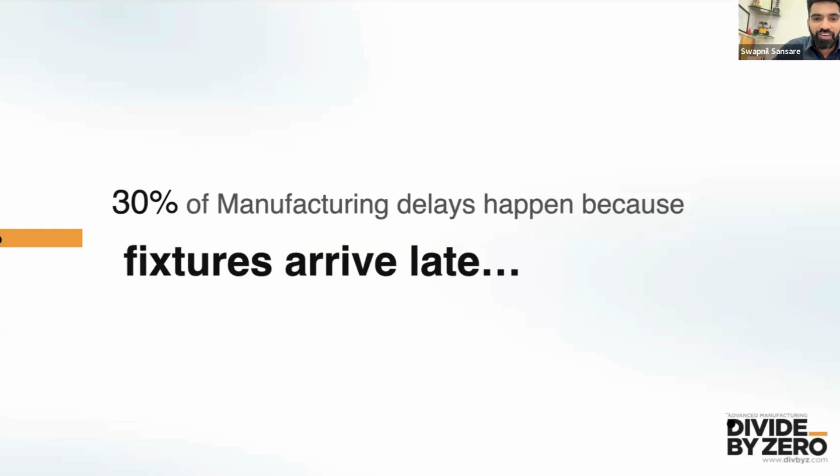The trouble here is most of the components that are designed are in 3D. Then goes the 2D designing with tolerances, and once they get the tolerances, the fixture designing process starts. After that, there are initial trials, there are changes. Because fixtures are made using traditional methods, again, a lot of back and forth on the tooling, and the actual initial manufacturing trial is delayed by at least 30% on average, is the number we're getting, and it's a big number. And we are here to solve this problem and look at the solutions.

We tried this back in 2018 as Divide by Zero initially. And let me just walk you through what happened then and what we are offering now. So this is an assembly line video where 3D printed fixtures were deployed. These were hybrid fixtures, and this was when we started working on these fixtures in 2018. Again with poka-yoke and a lot of complex engineering and components that you can see.

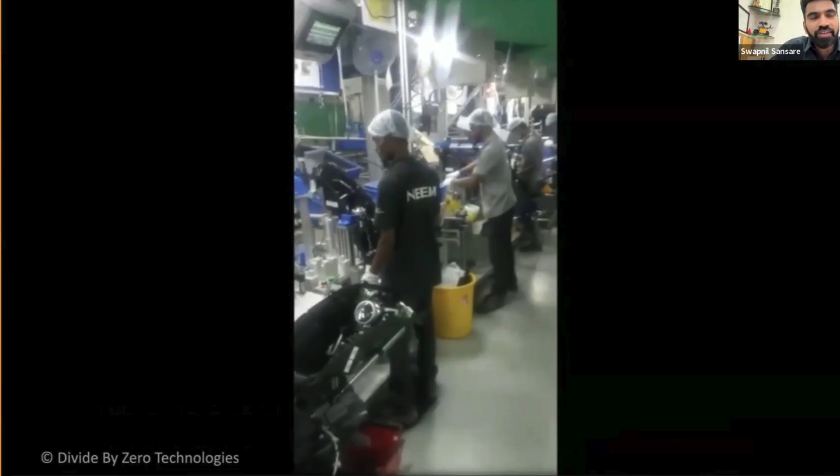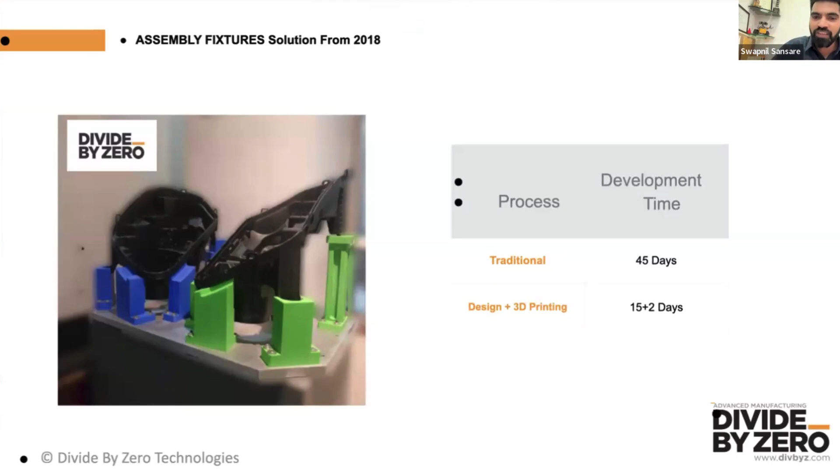And there were at least 1,200 fixtures that we delivered with designing, 3D printing, and processes. Process time here was still large. Traditional used to take 45 days, but this still took 15 plus 2. I mean, 3D printing was possible, but design time and reiteration and going back and forth on that took a lot of time.

That did not work out majorly because the design process was time consuming. We were dependent on the experts who could design fixtures, understanding tolerances, going back and forth on trials and then coming back. Again, a lot of revisions here, and that added to delays. With 3D printing and the materials available at that point of time, the fixture strength was not that great, and accuracy and tolerance issues were there, and the process was not optimized, so we could not bring this solution to many of the customers we intended to.

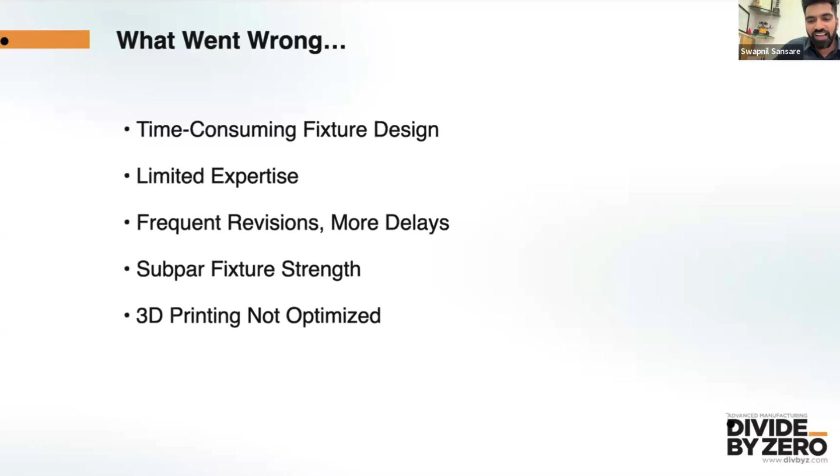However, there were two major challenges. One is design, which is about the complexity, expertise gap, and iteration delays. And second was the development challenge, in terms of manufacturing these fixtures. We are going to address these two challenges in today's workshop, where I introduce you to Trinckle and FixtureMate. So Kaushik will take over and explain Fixture Mate, how it works and how we are solving this. Over to you, Kaushik.

Thank you so much, Swapnil. I hope I'm audible right now. Yes. Perfect. So let me share my screen.

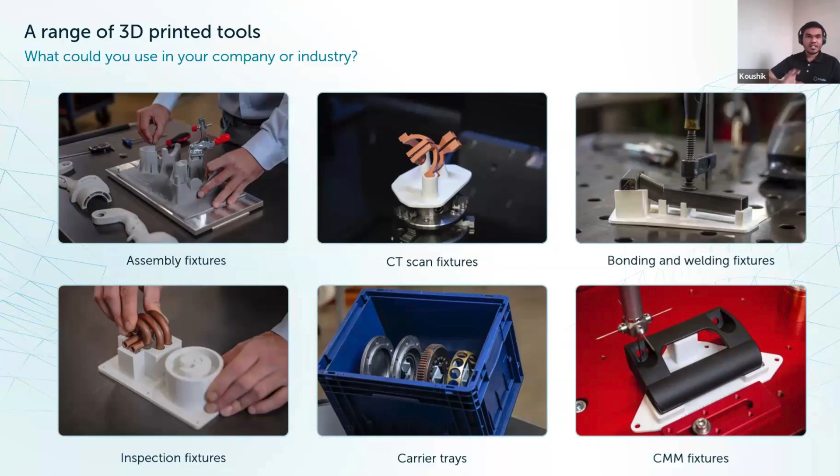So 3D printing is a good scenario for this as well. So all these scenarios can be thought, and FixtureMate provides a solution to every single category of this. But as I said before, this is not the complete list. This is some of the list that I am showing here at the moment, just to give you an idea of what we can do with 3D printed fixtures. There are a lot more applications like laser marking and laser engraving as well, which would be an interesting use case to some of you.

So just to wrap it up, we have clearly seen that 3D printing is attractive to your company. We have clearly seen that there is a possibility of creating multiple fixtures and stuff. There is still a puzzle piece that is missing, which is the design time. So who takes care of all these designs for you? Challenges when it comes to designing jigs and fixtures, right? So let's say you have a sudden requirement of 100 plus fixtures in your factory. So who will design it?

So either it has to be a CAD engineer or a mechanical engineer. He has to devote his time to design it, but he has to be distracted from his normal day-to-day activities or high priority tasks. So this would actually delay your entire workflow. That is a big challenge, or a big bottleneck that would happen in your company.

Then the second thing is the cost to design a fixture is not easily estimatable, right? Because there are a lot of factors involved: the size, shape, complexity of what fixture you are trying to use, that determines the cost. And there is also a hidden cost which is going on here.

Let's say the requirement from a shop floor has to be translated onto the designer's table, right? So they are sitting at different places in the company. One has to go through multiple communication chains or administrative chains in order to make it happen. So all those things will be adding cost to you without even knowing or understanding it in the background.

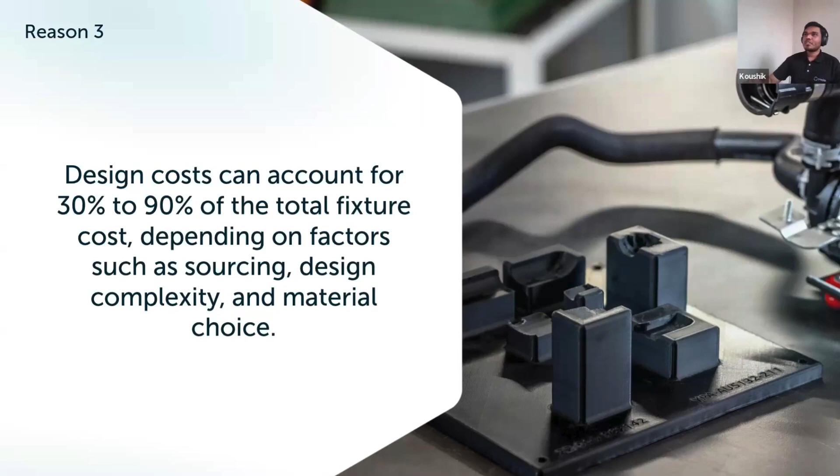So because of all the previous reasons that we have just discussed, just the design cost of the fixture can take up to 30 to 90% of your total fixture cost. So this is not so good, right? So we have a great potential from technologies like Divide By Zero, which can accelerate your 3D printing manufacturing process, but the bottleneck is still lying in the design.

So that is where FixtureMate comes in, and we try to solve your problem. So FixtureMate is nothing but an intuitive cloud-based software. So it can allow anyone in your organization to design fixtures in minutes, not hours, just minutes. So how do we do it?

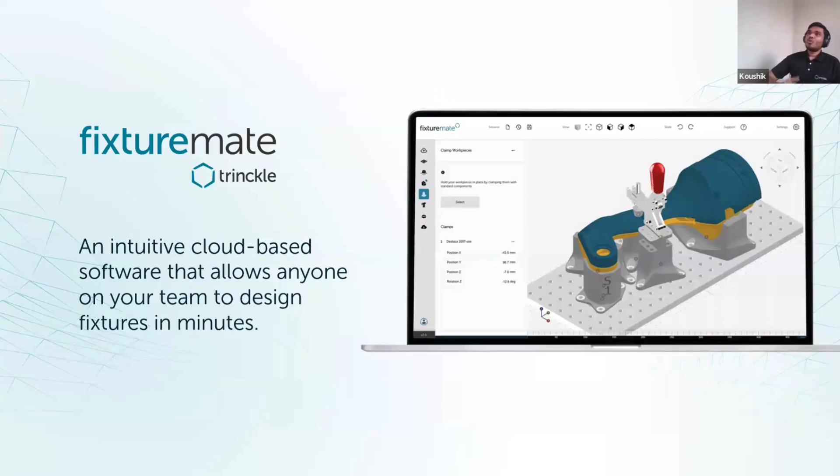When I say intuitive, what I mean by that is whenever a certain operation is involved in the fixture generation, like let's say cavity making or a subtraction feature, that is a repetitive task. So what FixtureMate does is it identifies all the repetitive tasks and it switches them into an algorithm-based approach.

And at the end of the day, for the user, it is just simple clicks and a few interactions that they need to do. So whatever complex steps are happening in the traditional CAD software, we are taking them, putting them behind the algorithm, and we are enabling a simple interface to the user so that they can do it without any issues and in a faster way.

So because of this design automation that we are talking about, we are reducing almost 80% of the tedious manual repetitive work. So when you remove all the manual and tedious work, what you are left with is an easy, intuitive interface that anyone in your organization can use right now. It is not just limited to the CAD experts for designing the fixture.

So because of this, you can speed up your production timelines and reduce the overall cost. And since it is a cloud-based software, you don't need to invest a lot on buying a good quality or a decent quality laptop. You just need a good internet connection to access it from anywhere in the world.

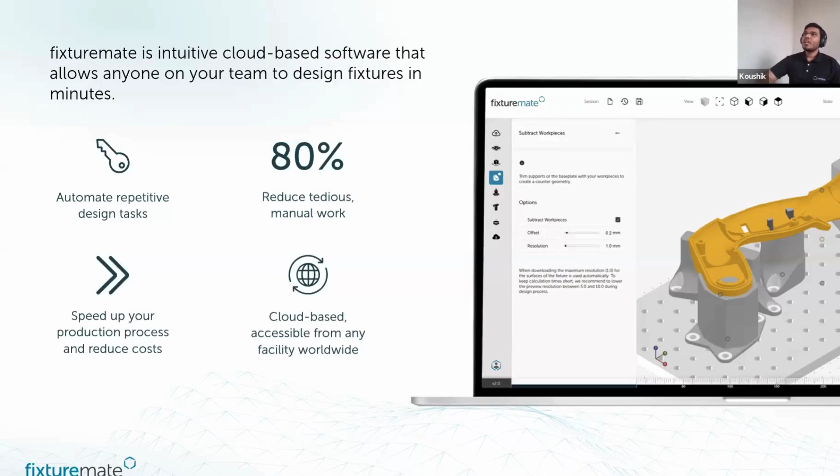So this is just a summary of what FixtureMate does and solves for you. Since all the repetitive tasks are taken care of by the algorithm, there is no manual error involved, right? When you repeat a task again and again, there is a chance of human error happening somewhere during the design phase. But when it is behind an algorithm, which is very strong and does it for you, it will always try to get designs right the first time.

And you can always do easy modifications on the go. It is not parametric, so it won't hurt you in any way, because I have a little bit of experience with some CAD software, and all the features you make might be interlinked with each other. So if you change or delete a feature, other features might get affected, right? That makes editing a heavy task, but FixtureMate can do it easily.

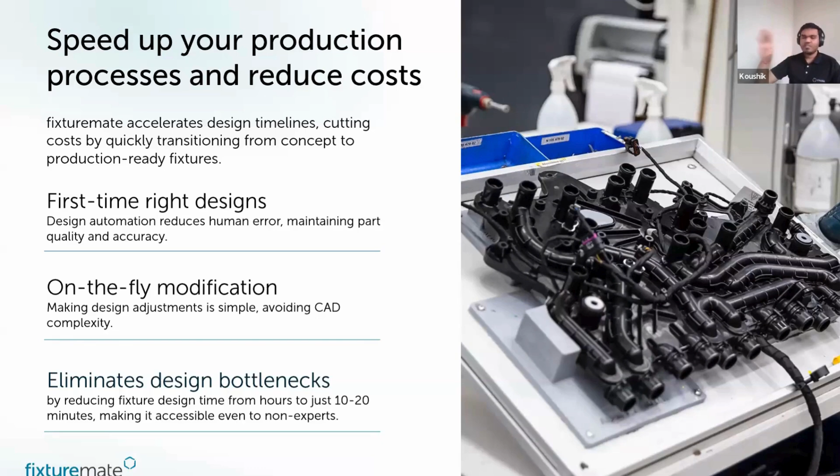And overall, we eliminate the design bottleneck by bringing fixture design time from hours to minutes. So we will actually see everything live so that we can understand how and what FixtureMate can do, right? So let me switch to the live demo right now.

Let me double check whether my screen is visible. Yeah, yes.

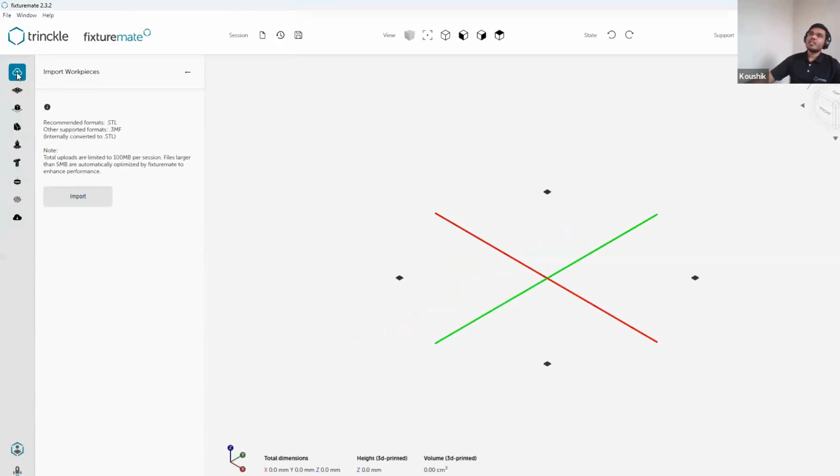Okay, perfect. Before we start, I would like to give you a brief overview of the FixtureMate software. This is the interface you are currently seeing. I hope you can see my mouse pointer as well. All the important icons you need for designing the fixture are kept on the leftmost pane, arranged so that the user starts from the top and works their way down to the last point. So it is all arranged in a nice fashion.

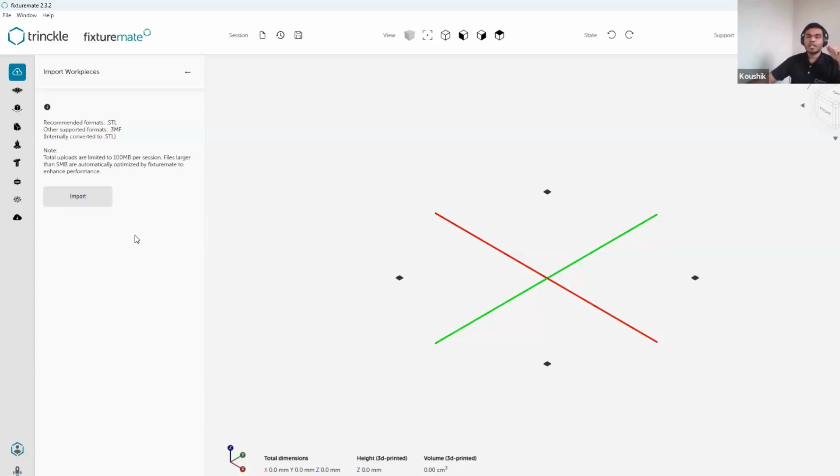We also have a couple of view controls, which do what they say. We have different views to quickly manipulate it, and a view cube with which we can quickly set the relevant views. So this is the basic overview. The first step in the fixture generation process is importing a workpiece. Let me go ahead and import a workpiece.

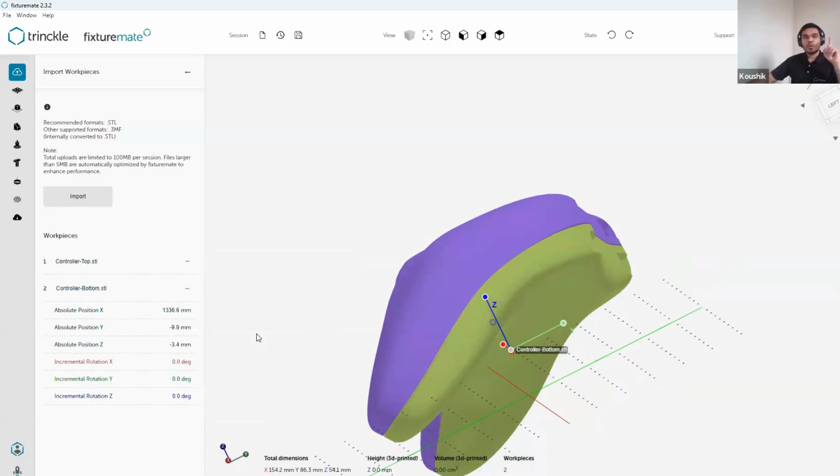So, let's see, I have imported one part. Let me import another part on top of it. As you can see, these two parts are assembled together. This happens if the user properly exports their STL files with the correct coordinate system. Then inside FixtureMate, it will get assembled in a nice way.

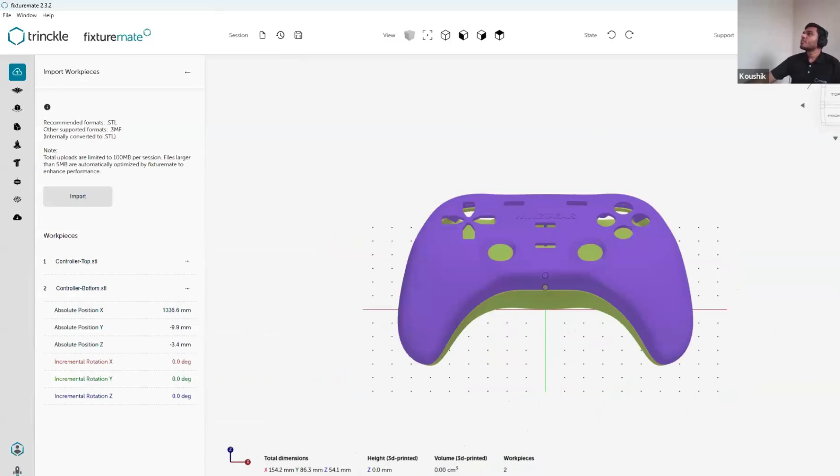Just give me a moment, because my screen is hiding a bit. Let me resize it. Yeah, this works.

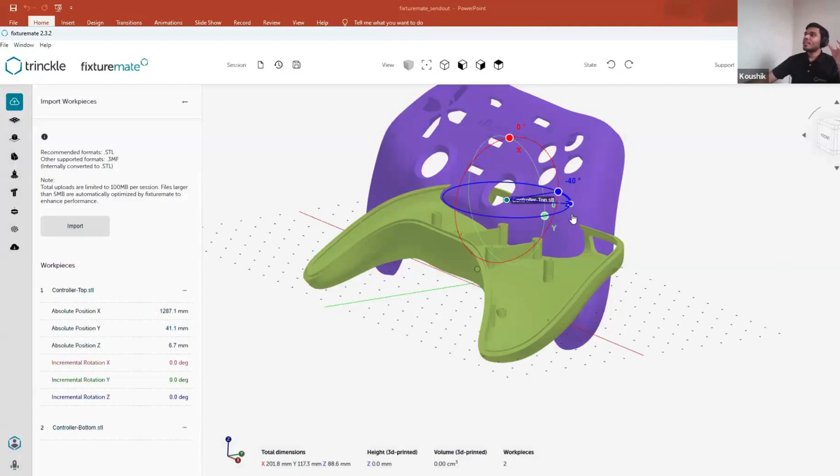So if it is exported with a proper coordinate system, it will appear the way you want inside the software. We have two markers here: with one click, we see the gizmo axes, with which we can move the part to whatever position we need. If we click twice, we get the rotational gizmos to easily rotate. You can see the degree popped up as well. You can rotate it to a desired location, or reset it back to how it was initially imported.

And you can always link both workpieces so they move together. I have enabled the linking operation, so if we move an object, both objects move together. This is the quick way of moving a part, but we can always do precise movements with the left pane. I can type in XY coordinate values here, like this, and orient the part the way I need.

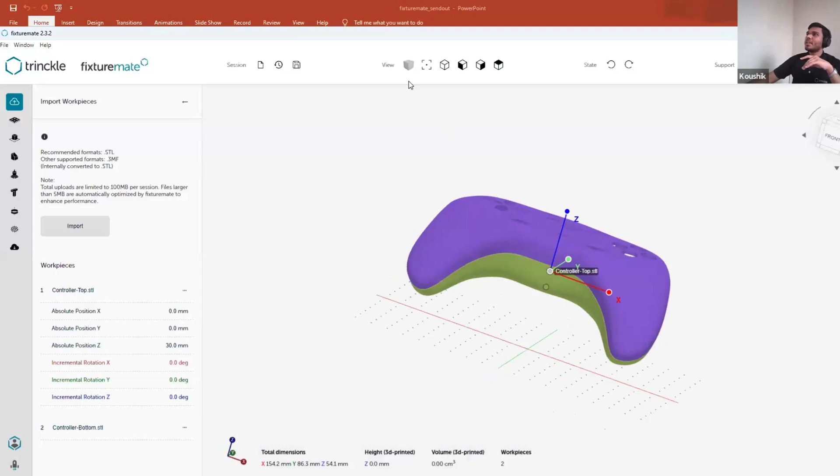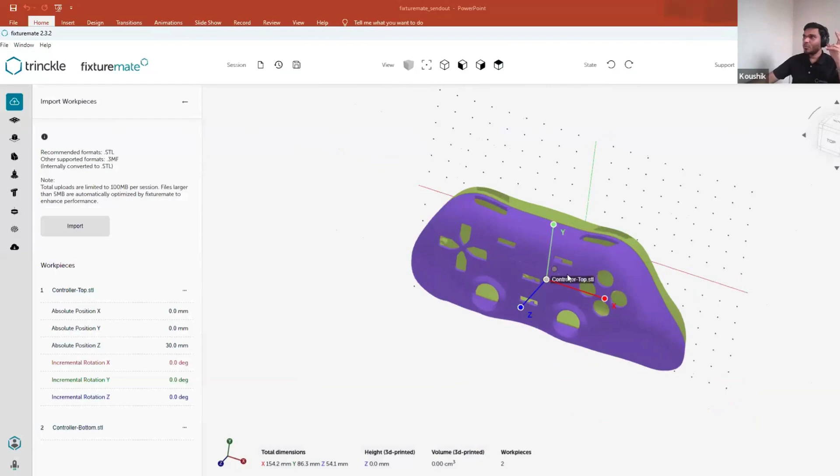So once this is done, we are trying to make a laser marking fixture, and the user has a requirement to laser mark the topmost portion, which means it should be pointed up. We can do it in two ways. One, we can directly type in the values we need, or the neat way I would like to show here is to click on a part, use the feature called align to XY plane, and type in a value.

So what it does is whatever point you pick, that point will face the plane at a distance that you have specified before. So we have set a distance of 50 mm. So the bottommost point that we have picked right now is at a distance of 50 mm from the plane, like what is shown. So this is there.

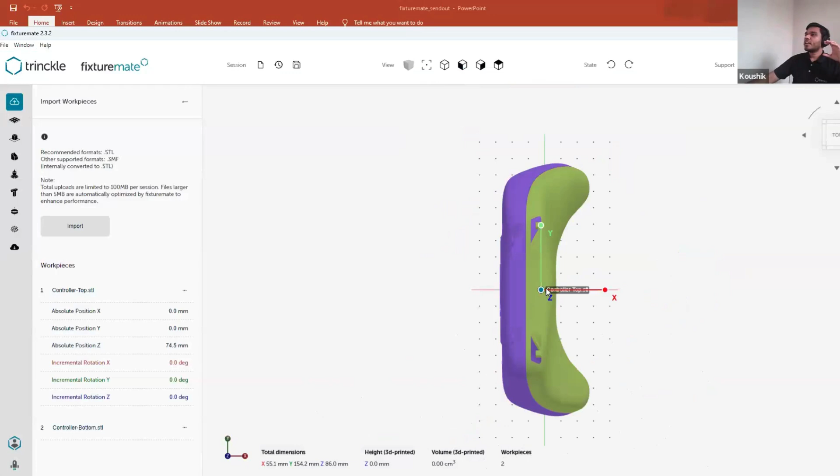Let me also try to rotate it 90 degrees so that it is horizontal and it is looking a little bit nice. So the first step is to import the part and orient it in a desired way. Once you've done that, the next option in our list is selecting a base plate.

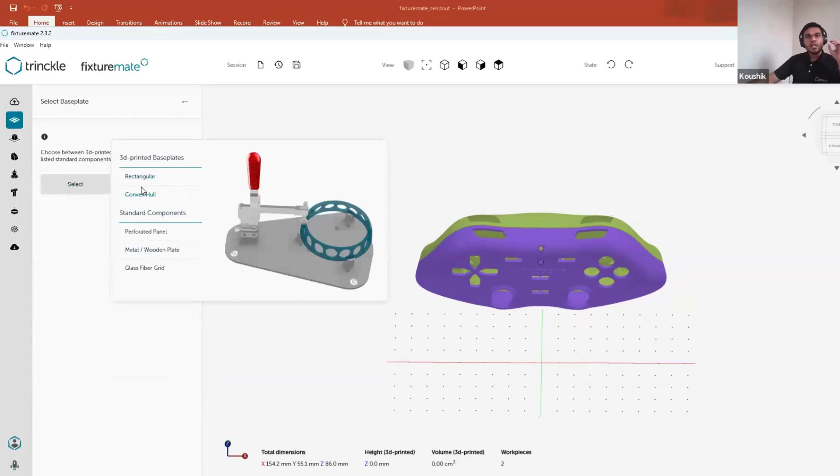So FixtureMate offers 3D printed as well as standard component base plates. When I say 3D printed base plate, as the name suggests, both the base plate and the support are exported as a single STL file. You can put it in your printer and directly print it. But if it is a standard component, there will be plates like this, and you have to design separate supports and then mount it separately.

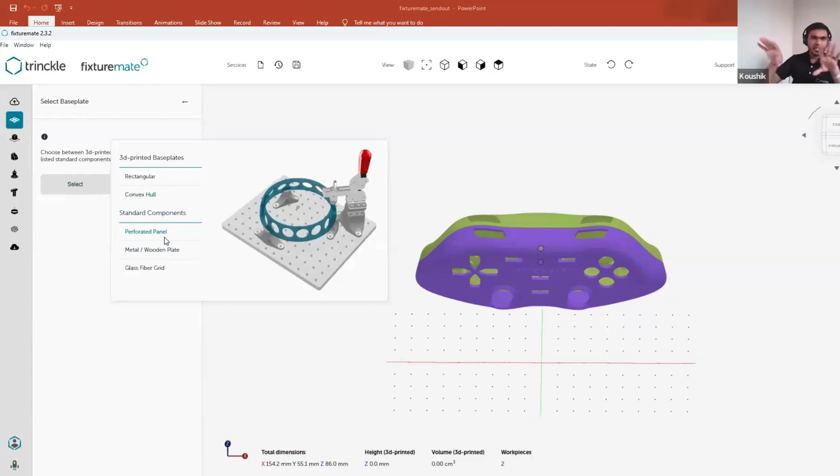We will see that in detail, but for the sake of a demo, let me go ahead with a rectangular base plate. So I have chosen rectangular base plate. You can type in the values that you need, or you can type in fit size. Let me switch to the top view. What it does is it takes the extremities or the bounding region of the workpiece inside, and it will offset it by the value that you have specified here. So if I type in 20, it will get offset that way.

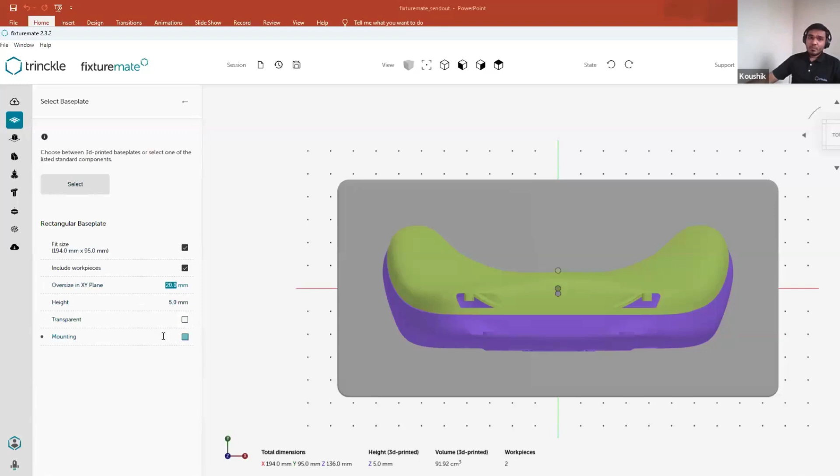There is also an option to enable mounting points in a quicker way, so you can change the diameter and the XY offset here as well. Once this is done, the next step is to create supports to actually hold this workpiece. FixtureMate offers a lot of nesting options or support structures, from custom shape, conical, cylindrical, and rectangular. But for the sake of demo, let me just take a rectangular one.

And as you can see, once I click it, I have an option to freely move and set the dimensions that I need. So I can click it up here. You can move the supports in a faster way by holding the center. You can rotate it to the value as shown here. You can click on any points and then move it the way you need. If you need precise adjustments, you can always do it here.

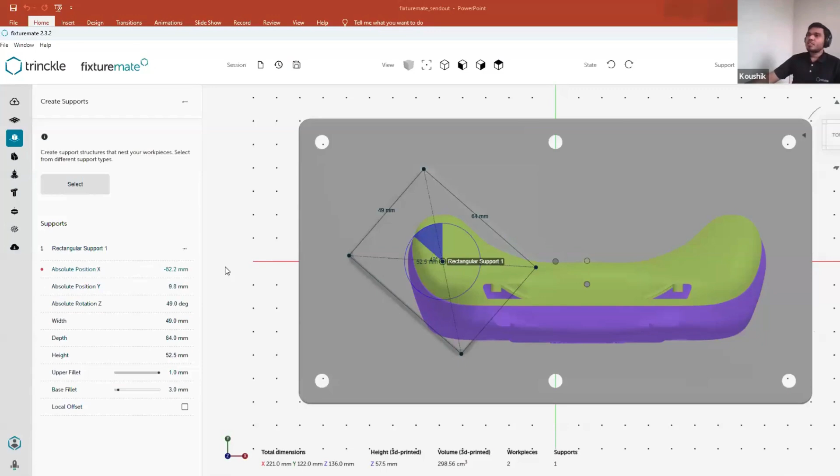Let's say I want 60, I want to place it at center. I want no rotation on my supports. You can do it with the left pane as well, but the right is for fast modifications. So I have done that.

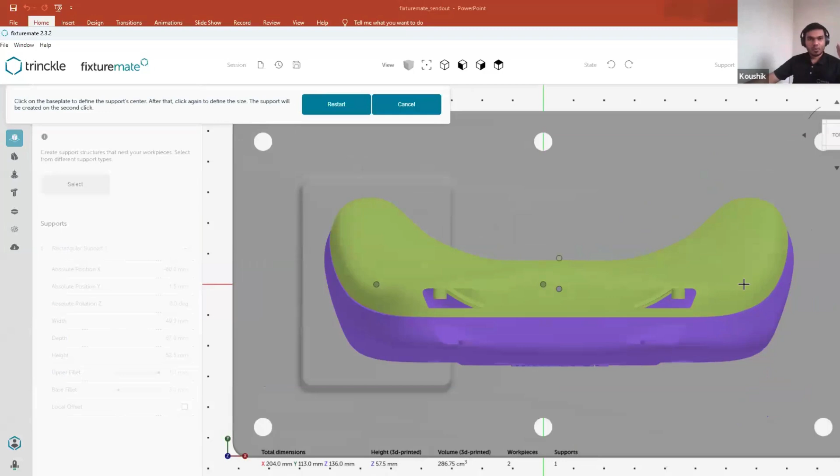So let me go ahead and do a second one as well. I have used the keyboard shortcut of space, so it repeats whatever the last action was that I did in FixtureMate. The last action that I did is creating a support, so that is being generated right now. Once you are happy with the size of your support structure, the next step is to determine how long your support structure needs to be, right?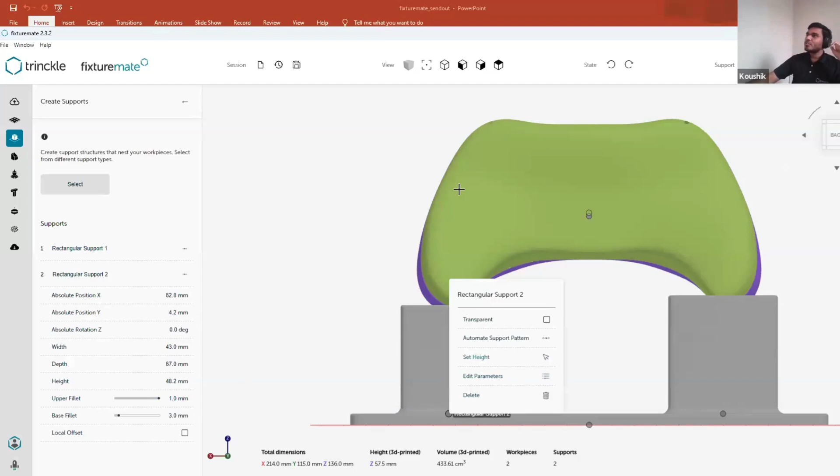So there are three ways to do it. One, you can just directly drag it. Or the other way is just typing the values here. And the really nice way that I would like to demonstrate here is you can right click on a support and click set height. What it does is basically it allows you to pick a point anywhere on the workpiece. Let's say I'm picking a point here.

Did you notice what happened? It just extends the support to the point that is actually being picked. So that is there. Similarly, let me try to pick some different height like this. So yeah, you can see that the support is picked.

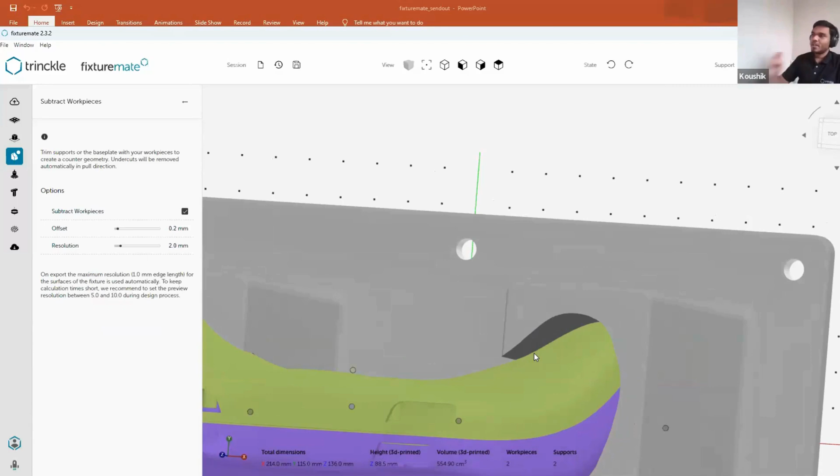So once this is done, the next step in our process is the subtraction. Let's try to subtract it. It is a single click. You can see that the fixture is getting subtracted. Did you notice something here? It is not a simple A minus B subtraction or a Boolean subtraction. It is a projected subtraction so that you don't see an undercut or a piece which is preventing the workpiece from being lifted up. So that is done automatically for you.

So it can always ensure that you can take the workpiece from the Z direction. You can take it like this and then put it back. So the software will ensure that the cavity that is generating is taking care of that.

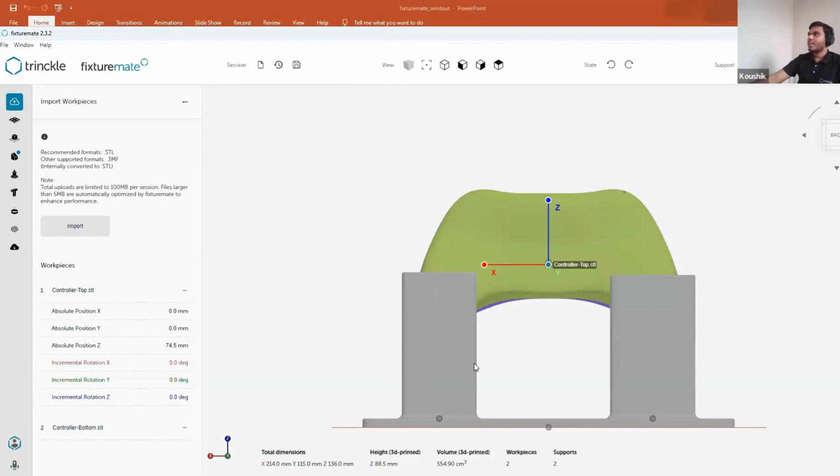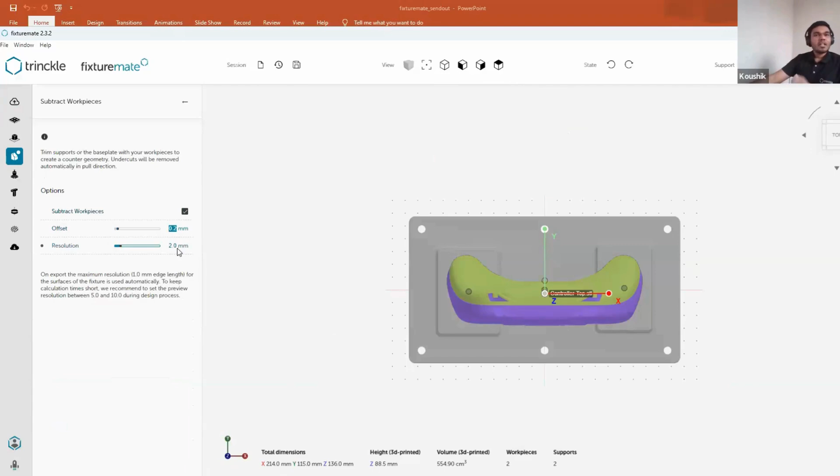But what I would recommend you is to change this offset. This is a global offset, which depends on the tolerance of your actual workpiece and the material that you are trying to print, because it can shrink and it can make it harder to fit in, or it can make it looser to fit in. So this is the parameter that you can change to make it more fittable, let's say. So I have given an offset of 0.2. Let's say if I give 0.5, you can see that it is globally extending.

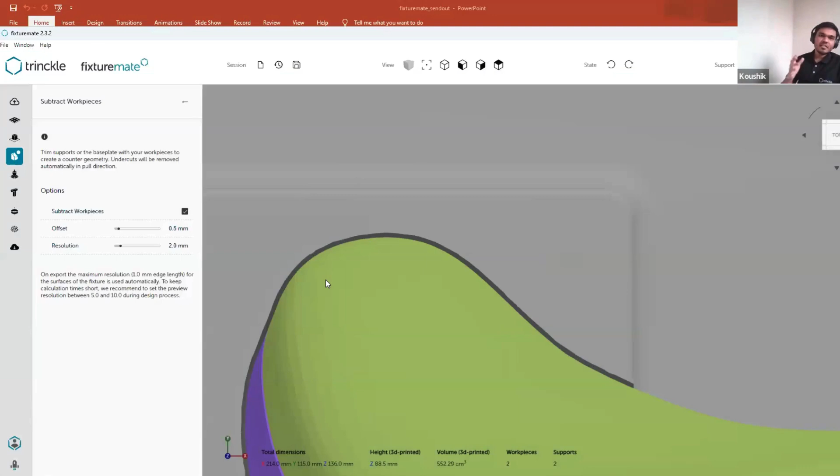So the software will also give you frequent reminders to save your session, because since it is a cloud-based software and we don't store any data, the user has to ensure that they save their session files at regular intervals so that they don't get it lost. So yeah, we have increased the offset as well.

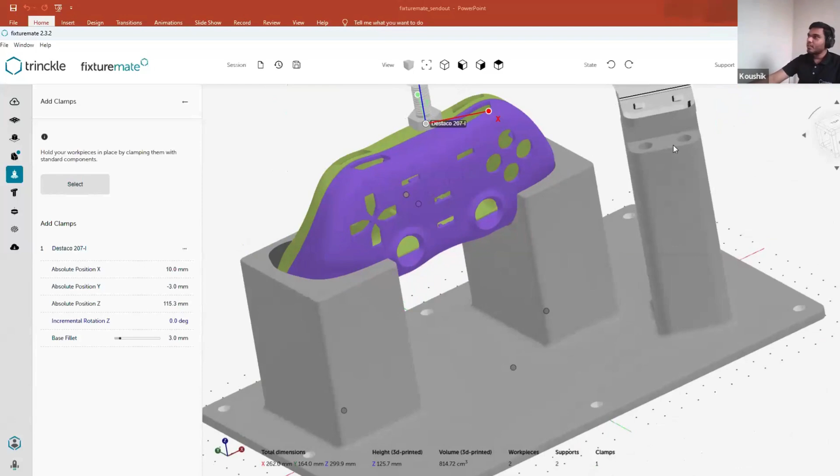So this is done. And the next step is adding clamps. Clamp is not required for laser marking use case, in my opinion, but for the sake of explanation, let me try to enable it. So we have different clamps, right? We have a good selection of standard clamps that is already available. Let me go ahead and pick maybe this. So I can pick it and then click on a point, and then the clamp will be positioned in a faster way. The support structure for the clamp is also auto-generated, and the screw holes, the thickness are all automatically taken care for you.

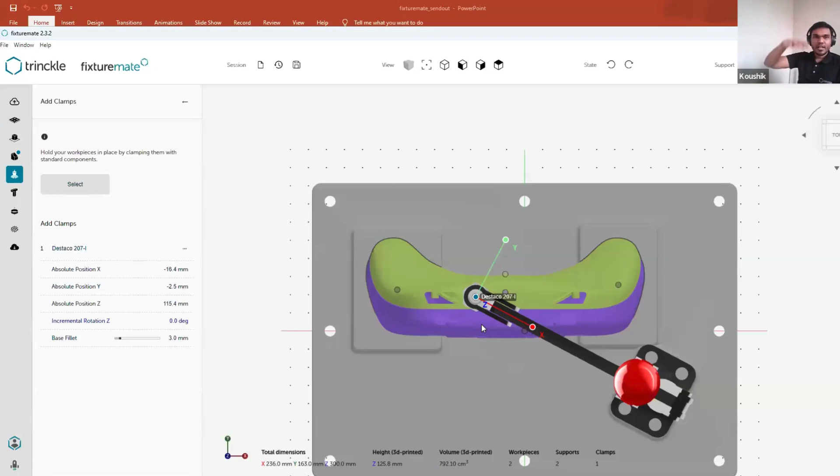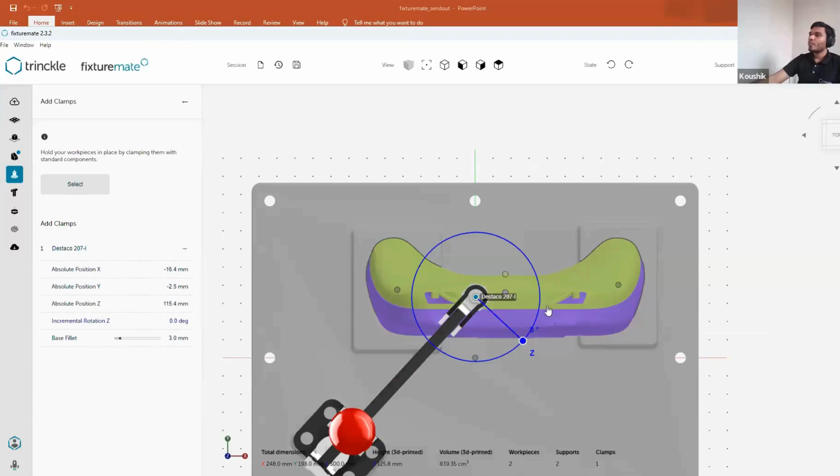So if you want to do some changes to the clamp, let's say you want to move this to a different location, you can click on the marker and then move it to a different location, and the software will take care that it is positioned properly in terms of height and orientation, right? So you also have the option to change the direction or the rotation of the clamp. Let's say like this, to the position that you need. That is also possible with FixtureMate.

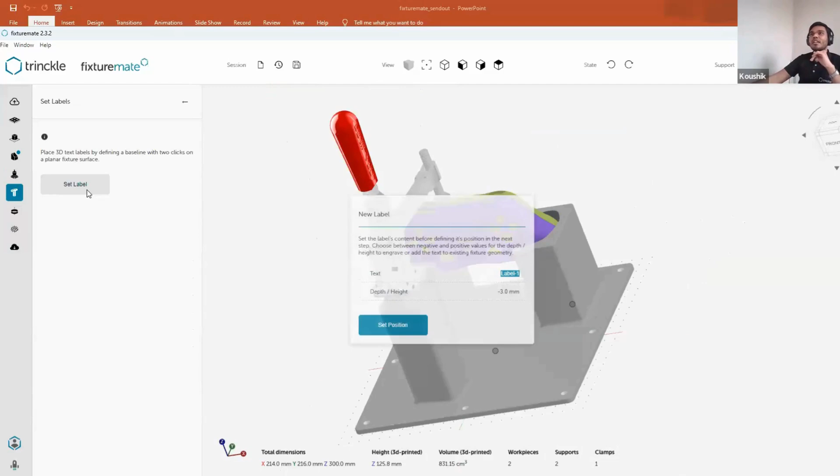So once we have imported the part, oriented it, created a cavity structure for it, held it down using a clamp. So once this is done, we can go ahead and try to add text labels to our fixture. So we have a height or depth parameter. So if we give a negative value, it is an engraved text, but if we give a positive value, it is a projected text. So that is the explanation here. So let me go ahead and type in the text that I need. I am typing FixtureMate, and let me try to pick any 2 points, and let's see what happens.

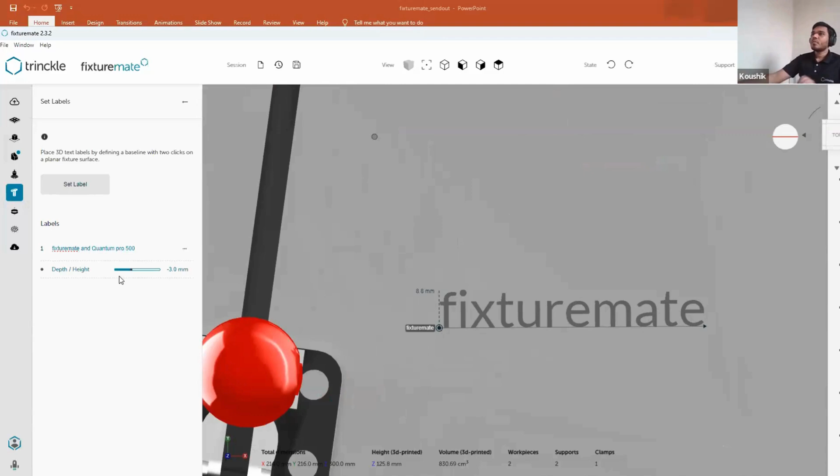So whatever the text that we are trying to enter, right, it will always lie within these 2 points, and you also get a prompt of what is the text height there, so that you can ensure whether the text is visible enough or not. And then you can type in, you can update it easily like this. And it will always ensure that the text lies between those 2 points. It will adjust the height accordingly based on that. And you can place the text anywhere, right? On the curved surfaces, anywhere on the 3D printed geometry, you can place it.

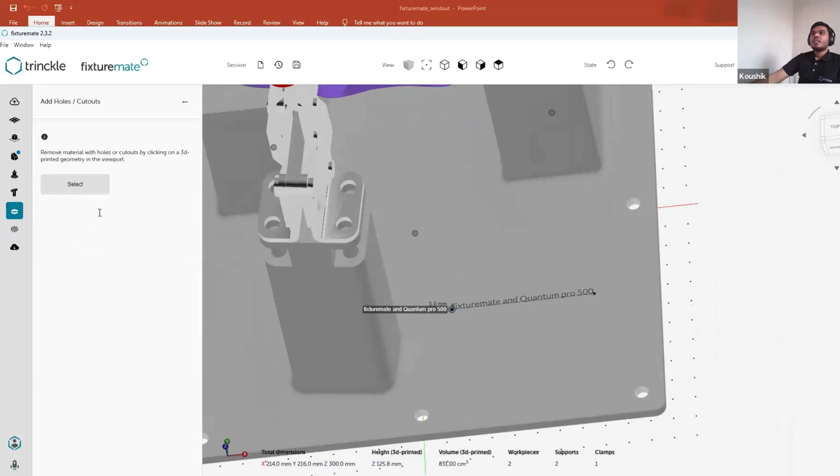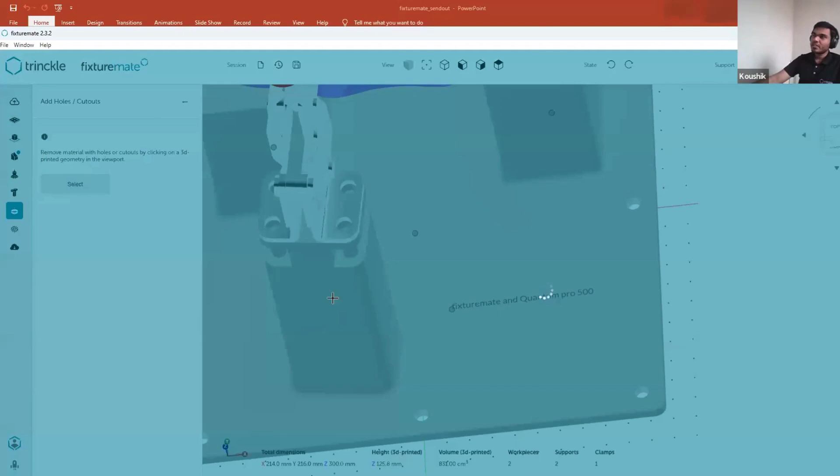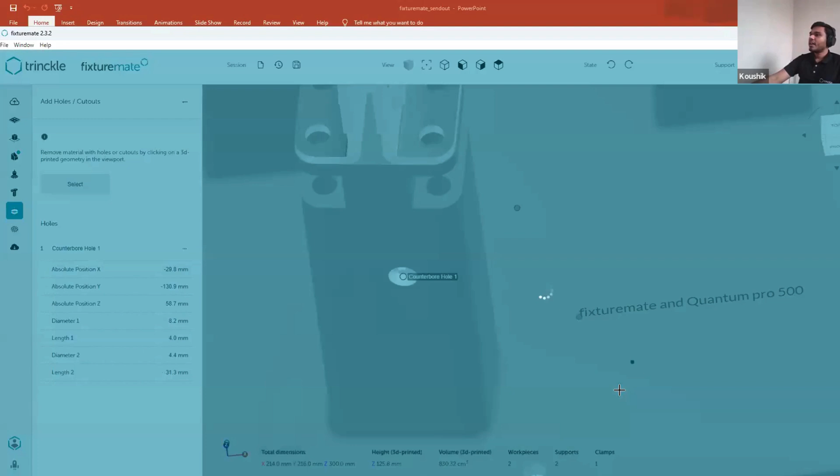So the next option is adding holes and cutouts. So these are the standard hole options that one might often use. So we have these options as well. Let me go ahead and try to do a counter bore. You can type in all the values that you need, set position, and you can click anywhere on the 3D printed surface, and it will enable the counter bore for you in that region. You can also try to make it a through hole so that you basically see it from the other side as well. You can quickly drag it to a different plane. It will automatically be referenced to the bottom plane as well, like what we are seeing here. So it is completely flexible to do it.

So there are also cutout options available. Cutout, you can think about something like if you want to have some wires on your 3D printed surface, or if you want to remove certain features from the fixtures, you can do that using the cutout option. So I'm just enabling the through cut here just to show you how it is coming. You can see that the cutout is also there.

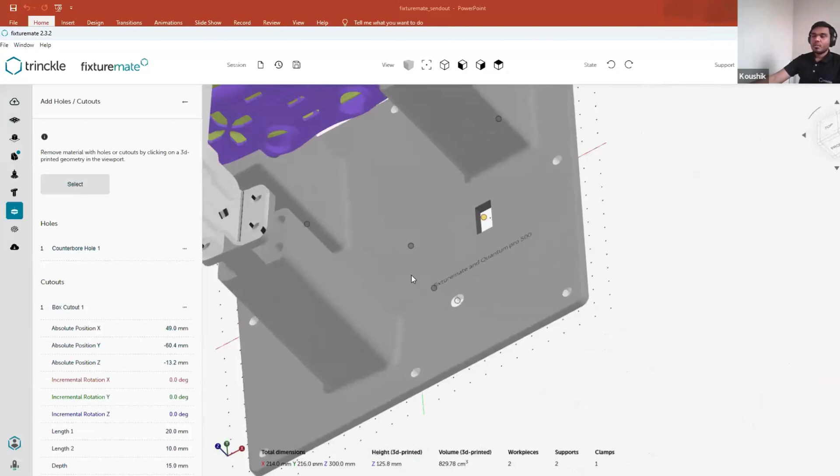We also have a pattern option for cutout. If you want to pattern it, linear pattern is supported. You can do that. And there is also another set of cutouts available such as sphere and cylinder. So that is there as well.

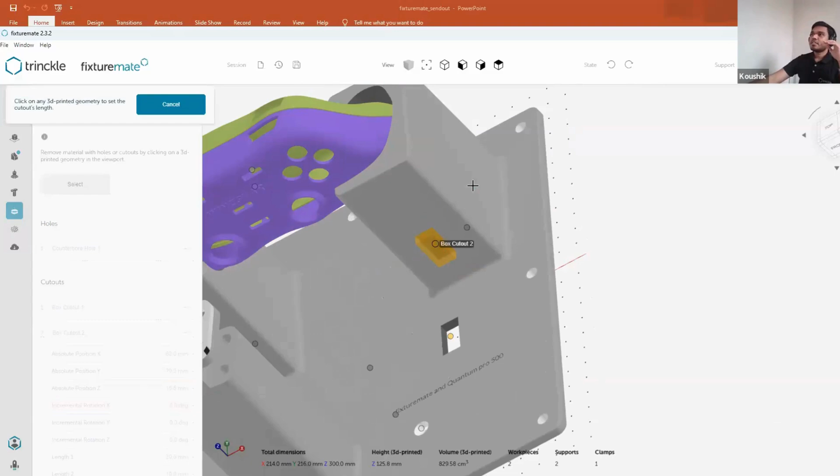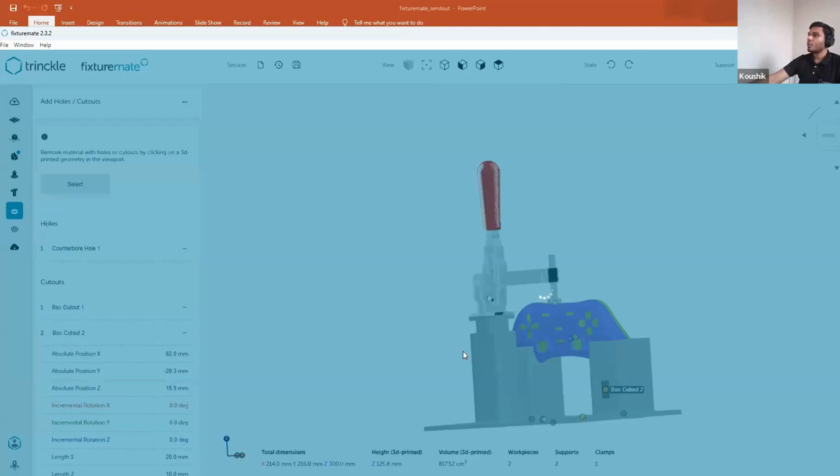Probably one more nice feature that we can see is we can set the cutout on surface. Similar to what we have seen for set height, right? There is also an option to set cut to surface as well. You can click on a surface, and this box cutout would be extended till the point that we picked on the workpiece. So that is also possible. So let me go ahead and, yeah, let's leave it like that. Probably we'll delete this one because it might not be needed. So yeah, this is done.

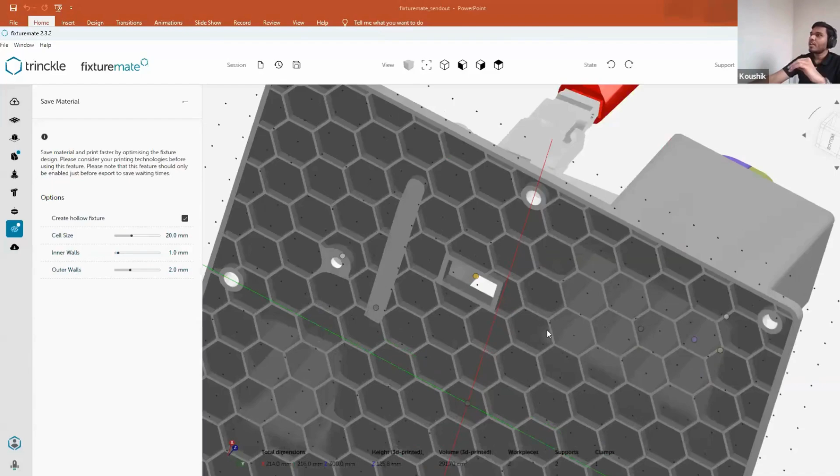Let me go ahead and show you the next feature, which is called the hollow feature. So this is an optimization feature, right? So what it does is instead of having a thick solid structure all together, you can create hexagonal structures like this. So you can adjust the cell size, inner wall thickness, outer wall thickness for the hexagon, and you can basically create a hollow mass optimized structure as well. But please consider your 3D printing technologies before using it. This is mostly targeted to SLA and SLS options, if I'm not wrong.

So once this is all done, the last step is just to download and save the fixture. You can type in any name. So let me just type demo2 and download the fixture here. The hexagon is a heavy operation, so it might take some time to generate the STL. Let's wait for some time. Okay, so this is done. Let me go ahead and save it.

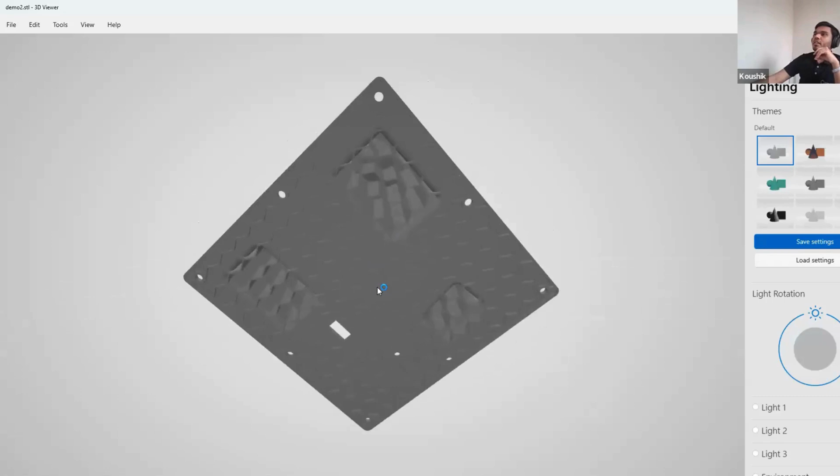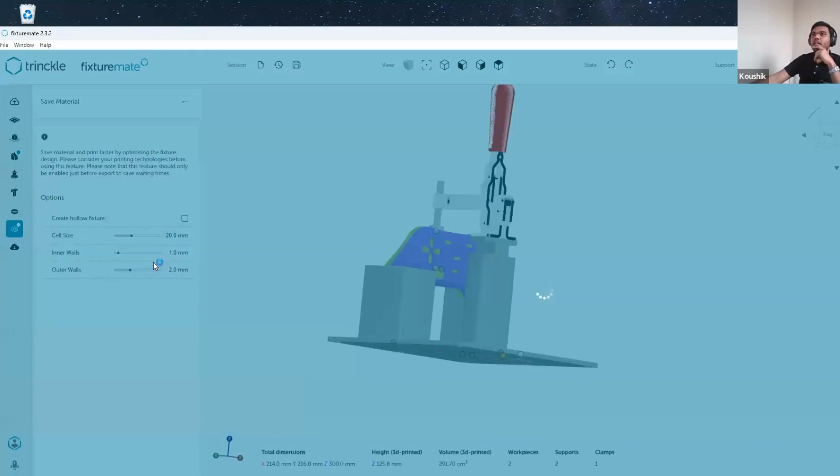So you can see that the fixture that we have generated has been exported as an STL, which you can send to the 3D printer for directly manufacturing it. So I hope you got a good feel of how quick it is to design a fixture like this, right? Let me try one more thing. Let me go ahead and switch off the hexagon.

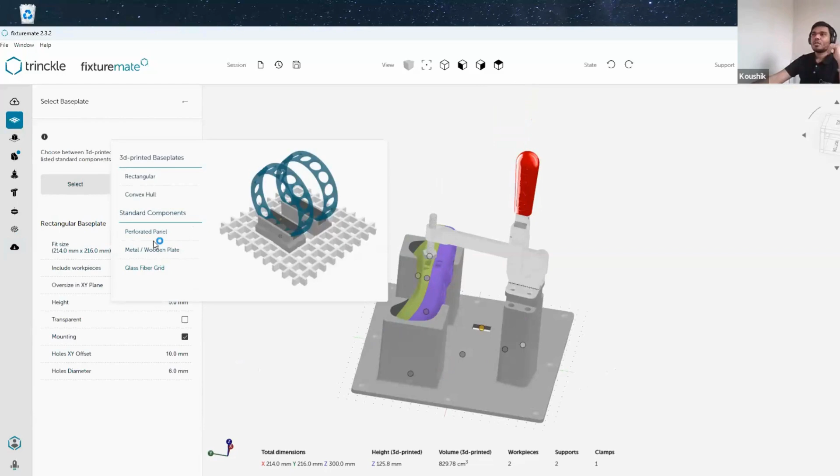I'll try to give you a scenario in which you have made a 3D printed base plate fixture like this, and you have a need to switch to a different standard component, let's say. So how will the workflow look for you? So you already have a session like this. So what can we do? We can go ahead and directly override the base plate to the perforated panel. You can type in the dimensions you need as per the data sheet of your perforated board. You can type in mounting holes.

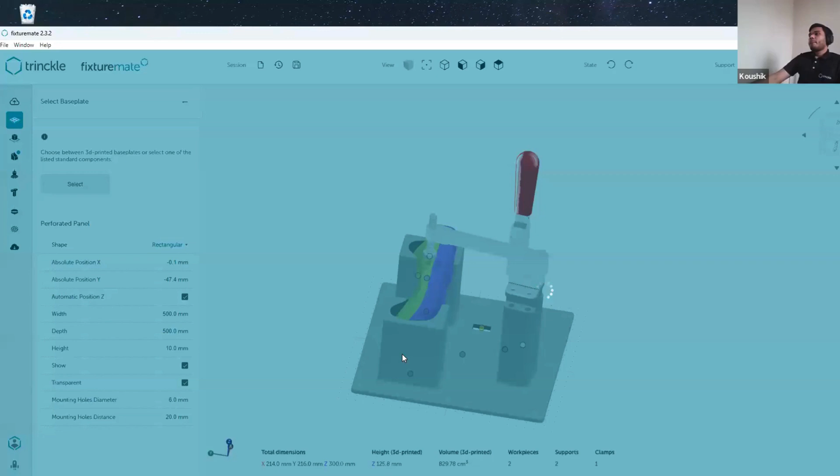We also support circular base plates as well, but for this demo, I'll just leave it at rectangular, and then we'll wait for some time. And the base plate is automatically updated in a quick fashion. So I think you can get a sense of how easy it is to change mounting, right? Let me go ahead and do something here because this is not mounted. Let me go ahead and try to do a different operation.

So it is giving me a warning saying that I have two rectangular supports and a clamp, which are not mounted to the base plate. So the software can give you a warning that you have actually missed it. So you can go ahead and click on the spanner icon here, which will directly prompt you to the mounting interface. So you can directly click on the points that you need to generate the mountings, and you can click finish, and you can see that the mounting points are automatically generated for you.

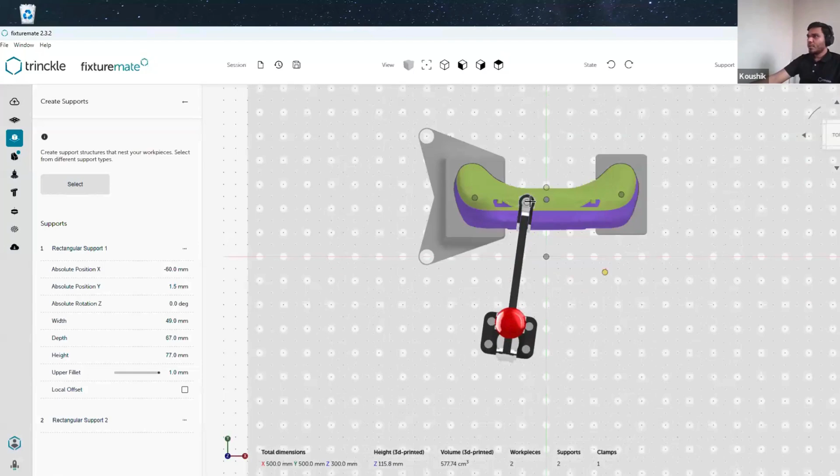Similarly, we can do mounting for other aspects as well. Like this, I'm just picking a random location, right? I think you would be much more experienced in picking up the right location, but just for the sake of explanation, I'm just picking up some random locations. So yeah, this is done.

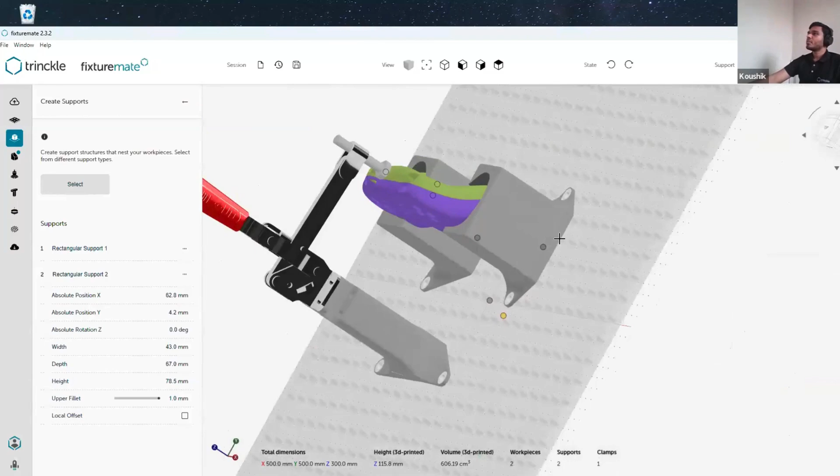And once this is done, you can still export it as an STL. But now, instead of one STL, we should get three STLs because it is three individual files that we are talking about. Let me go ahead and keep it as demo3, save it. Demo3, it is here. Let me try to extract it. Demo3.

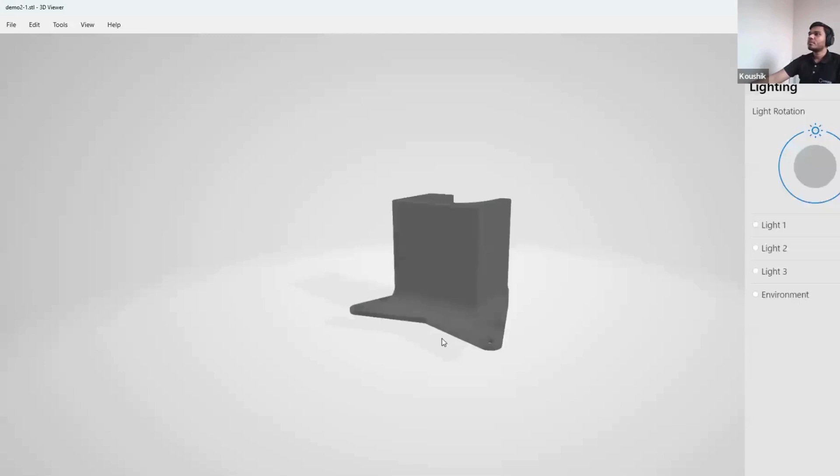Yeah, so we have three options, right? So one, try to open with 3D viewer. You can see the part that we have just designed with the fixture is also there. Similarly, the other two options as well.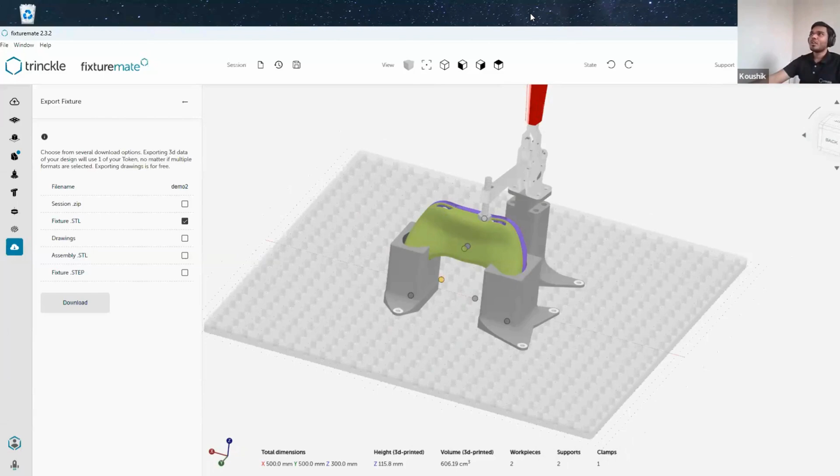So yeah, this is the basic overview of FixtureMate. I hope I have given you an overview of how easy the software is. There is also pattern operations available on the workpiece itself, so that is also supported. But I think this would have given you an overview of what the software can do. So let me jump back to the presentation and continue from there.

So in summary, we have seen till now what are the challenges with the traditional manufacturing and why 3D printing is attractive to the customer. And then we have talked about how FixtureMate can solve your design problems. We have seen a live demo.

And now let's try to set realistic expectations for FixtureMate, right? So what is possible and what is not possible when you think about FixtureMate? Because FixtureMate is not like the traditional CAD software, it is a design automation software. So single removal direction fixtures is possible, meaning the fixtures can only be put in and put out from the Z direction. Other directions are not supported at the moment.

And when we talk about the file size and file formats, the total files should be less than 100 MB per session of a fixture. So let's say you upload 10 different files into FixtureMate for a fixture generation. The sum of all the files should be less than 100 MB. This limitation is because it is a cloud software, so everything is handled in the server. So this is a good limit that we are setting ourselves so that you have the best performance at your end. And in terms of file formats, we support STL, STEP, and .3mf.

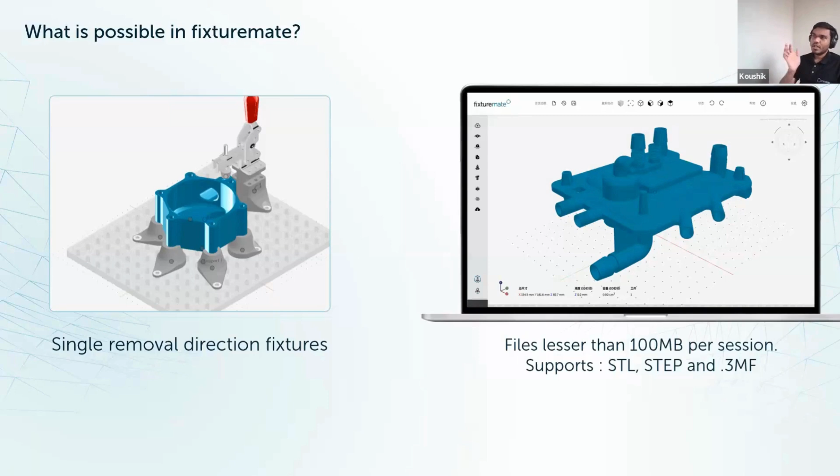FixtureMate works in STL format, so even if we try to import a STEP file, it gets automatically converted into an STL file inside. There are a lot of optimization options also available, which try to downsample your file to a good level before using it inside. But we would always recommend you to export STL with a decent quality, not with too much resolution, but with an optimum resolution so that you have a better experience with FixtureMate.

So I've talked about it. Let's see what the users think about FixtureMate, right? So we have Audi Sport. I think Audi Sport is very well known to everyone here. So there was a factory in Germany who had a requirement for designing around 200 fixtures for their Audi e-tron and other cars. So they were faced with a bigger challenge, right? They had a sudden volatile requirement of 200 fixtures, and the designers were already occupied with existing projects, so they were trying to find what would be the best solution for them.

So with FixtureMate, they have reduced the fixture design cost by 80%. They had estimated it to be 6 weeks, but with FixtureMate they designed 200 fixtures within 48 hours. So the average design time that they reported per fixture is 15 minutes. You can also see the 3D printed fixture that they have used in the slide here.

So mostly the users were trainees, process and production engineers. They didn't want to tax their existing CAD engineers. So the other engineers stepped up and it was so easy to use. So they have used it, they have even optimized it, and they have done it at a very fast level.

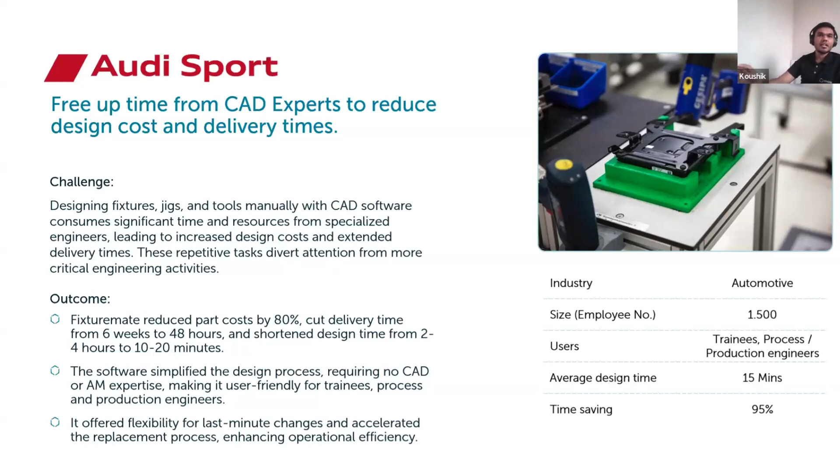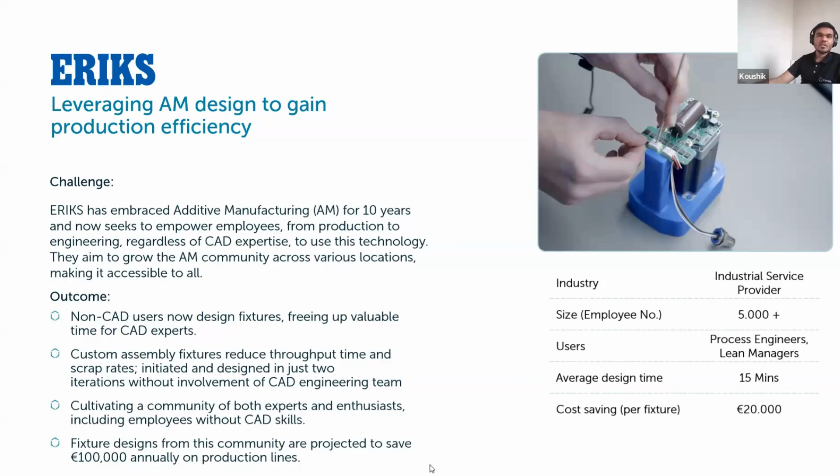Same story, but with a different reputed customer as well. This is ERIKS. They are also into additive manufacturing, and they also reported an average design time of 15 minutes, and they estimated that they have saved around 100K euros by adopting FixtureMate and 3D printing technology.

So next and final use case is Deutsche Bahn. Deutsche Bahn is a leading rail management system from Germany. They mainly used it for maintenance fixtures as well as logistic trays and fixtures. They have reported an average time of 25 minutes. So these are some of the workpieces and use cases that they are using in their company.

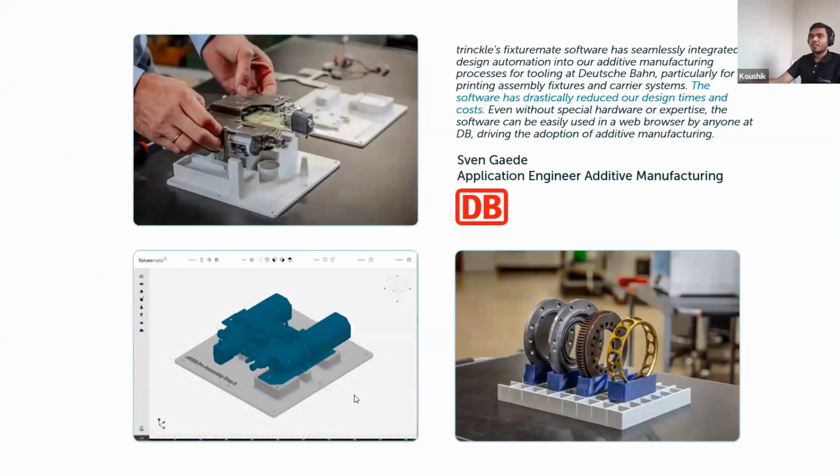So in summary, with FixtureMate, there is a clear design time reduction of 95% as reported by Audi. And since it is easy to use, the onboarding time that you require to learn this software is very low. You can do it in around 1 hour and then directly jump into the design process right away. So that is also a good point.

And ERIKS has reported a return of investment of 6 times. So this is also something to be noticed.

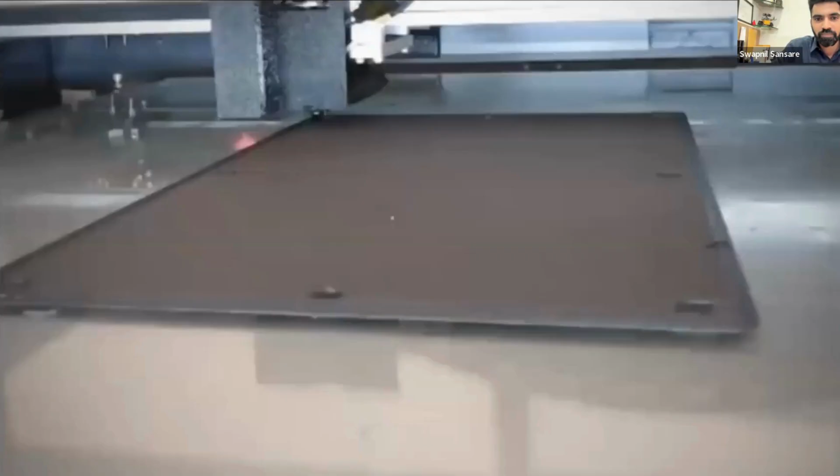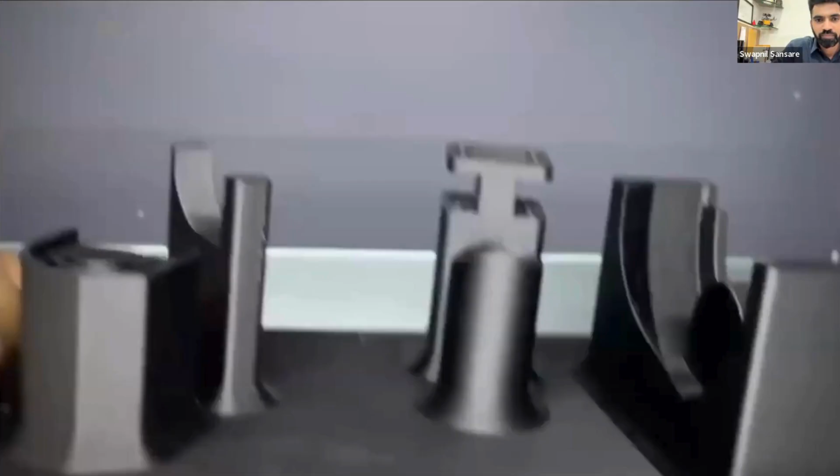So Quantum Pro 500 is one of the large format 3D printers that is specially developed for fixturing applications, where this machine can print composite materials like nylon carbon fiber, nylon glass fill materials, ABS carbon fiber glass fill, PETG carbon fiber. And we are testing more than 30 different materials right now, including polypropylene, including polycarbonate, glass fill and carbon fiber materials, and also ensuring these materials are available in extremely affordable cost.

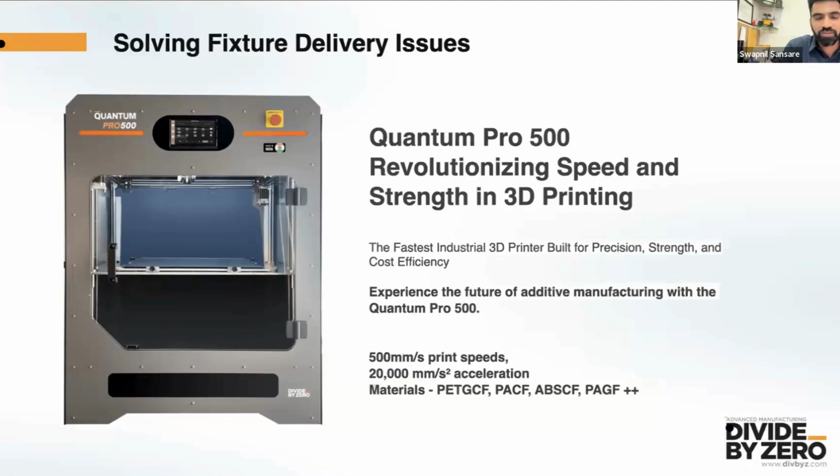This machine can do at peak around 550 grams per hour kind of deposition rate, which is really high when it comes to high-speed 3D printing. Again, this 3D printing option is something which is possible, but FixtureMate can also work with your CNC workflows.

So Quantum Pro and FixtureMate, you don't need CAD CAM and any expertise. You don't need extra software. You can have a standard normal computer which can work through web, and on cloud you can design and develop and deploy these fixtures. Again, if it's cloud based, you can communicate with different team members across the globe.

Beyond this, if it is required, there can be additional processes. There can be ways where you can add offsets to the final design files. You can change it. You can use hybrid workflows like 3D printing and CNC machining to achieve better accuracies, and that is completely possible. But we cannot cover everything and every type of fixture in here in this workshop right now.

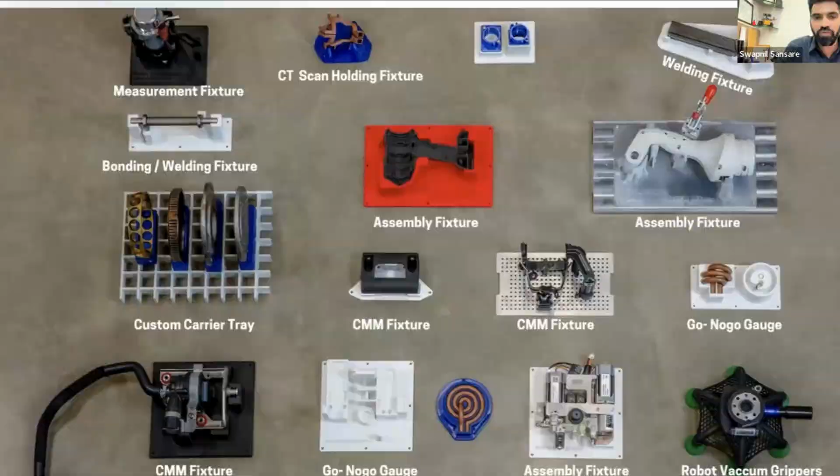So with that, fixture can arrive on time, not limited to 3D printing, as I said again, but through various possibilities and Fixture Mate.

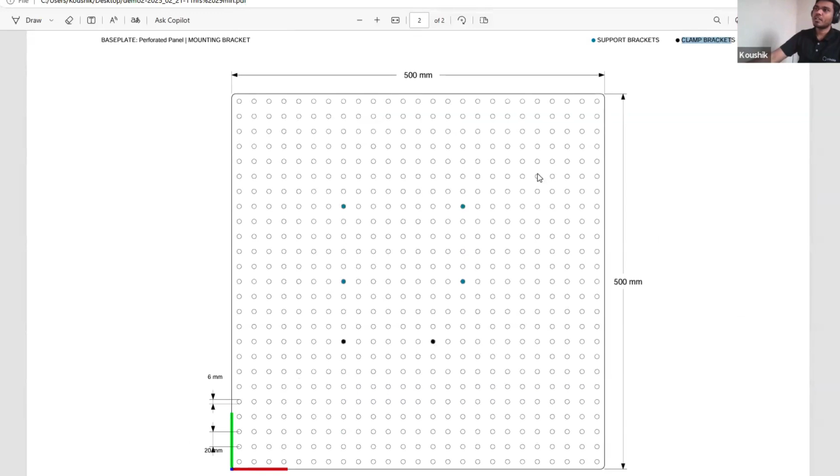Yeah. So when we talk about information generation or report generation, we have a PDF with all the default views, top view, front view, right view, etc. And we show a plate in which the maximum dimensions are marked, and you know which points to use in terms of fixing it. So the operator or the assembly person can look at this PDF and understand, okay, this is the point where I need to use a clamp, because you can see the clamp is marked in a dark region, so you know which one to place. So with this information plus this information, they can understand which location the actual part goes in the standard component.

Right. We have a few more very interesting questions, Koushik. A lot of interesting, engineering and very detailed questions. So will this software work with scanned files to create fixtures? I think they can have 3D scanned files and they want to create fixtures. It will absolutely work, because at the end of the day, it is an STL file, so the software cares about that.

But you should ensure, during a scan, because nowadays even mobile phones can scan parts, the problem is there will be a lot of unwanted details from the surroundings, right? So you cannot remove anything from the workpiece inside FixtureMate. You need to do some pre-processing, remove all the unwanted stuff, and then if you bring it back to FixtureMate, it can work perfectly. Understood. So you need a very clean and accurate scan file, but it can work with FixtureMate. Yeah. Okay.

One of our friends from Germany, Kaustubh, is asking, what are the critical considerations taken into account while designing welding fixtures? Okay. So, probably Swapnil would be more experienced to answer it, but I can just give you the software's perspective, right? What we care about in the software is we need to orient different parts in the right orientation, let's say.